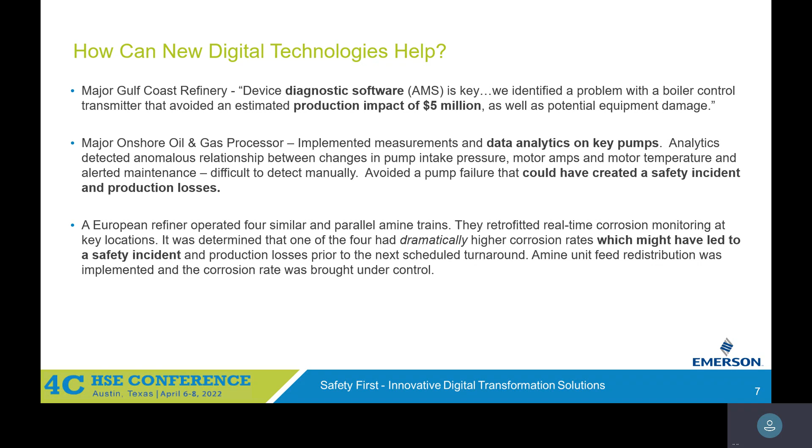So again, these technologies can improve safety. So what I want to talk about really is what happens with safety incidents, what's the problems, what does the data tell us the problem areas are, how can recent technology advances improve the safety, and then what comes next and questions.

So if you have a safety incident, I think of it in these terms: basically you have 4 different types of possible impact: personnel, environmental, financial, and community. And so you have to consider all of these in turn.

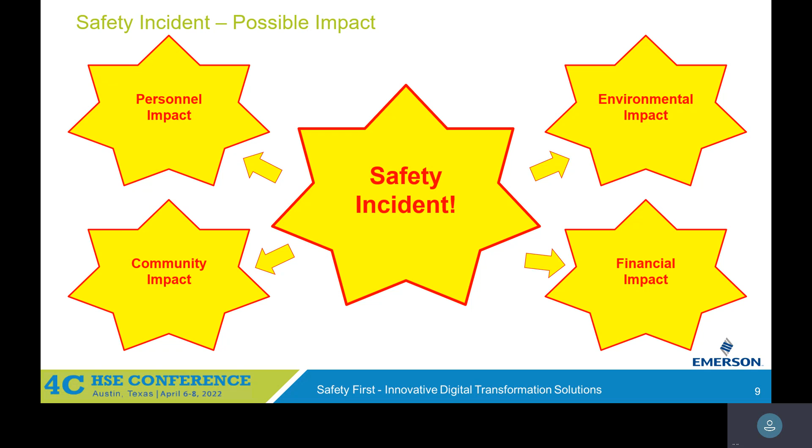If you think about what the safety performance metrics are, how do we decide whether or not these things are important? Here's the list of the metrics in each of these areas: occupational safety, OSHA recordables, environmental, tier 1 and tier 2, loss of primary containment, financial losses, and community problems.

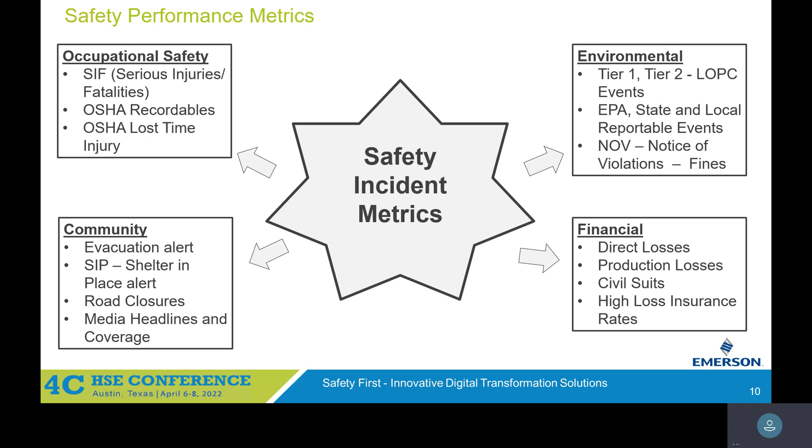So clearly a safety incident can have major impact overall. Now the API has standardized their reporting on safety. Recommended practice 754 allows you to look at data that has been collected.

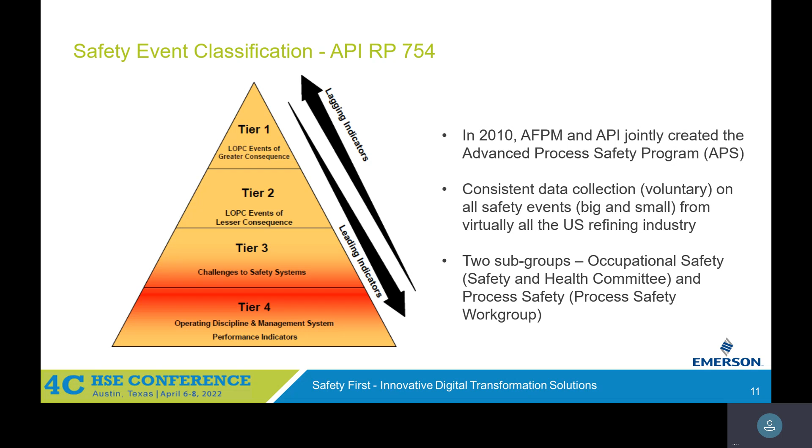Now they have standardized what they're reporting, and the AFPM and the API jointly created the Advanced Process Safety Program. This now considers about 90% of the refined product production in the US and about 75% of the olefin and major petrochemical production contribute data to this. This is publicly available, so you can go to their site and actually see the data on where incidents have occurred.

So what are some of the recent developments in safety? Well, there are three areas you have to be concerned about. First, OSHA, which governs things that happen inside the plant. EPA governs releases that go outside the plant site. And today we also have to be concerned about cybersecurity activities impacting safety, which falls under the government CISA policy.

In 2017, the National Emphasis Program was enacted, and it applies to refineries and chemical plants. It authorizes inspections, and any violation of a PSM standard is considered a condition that is likely to cause death or serious physical harm.

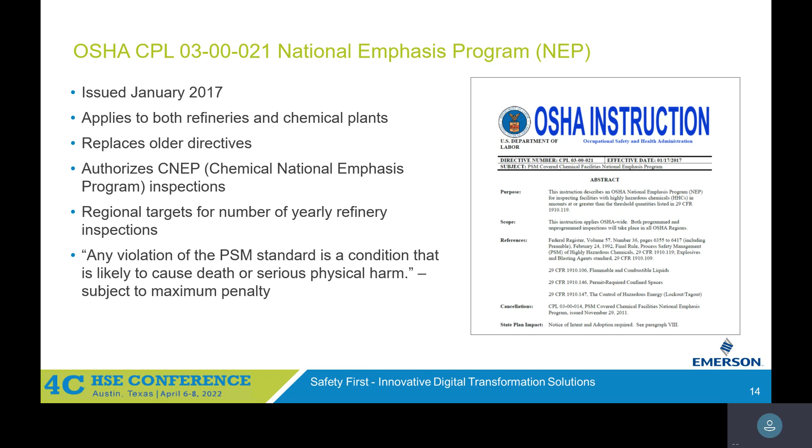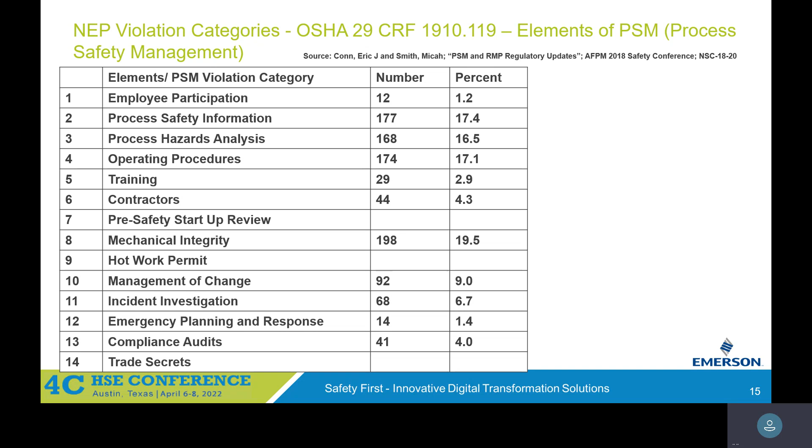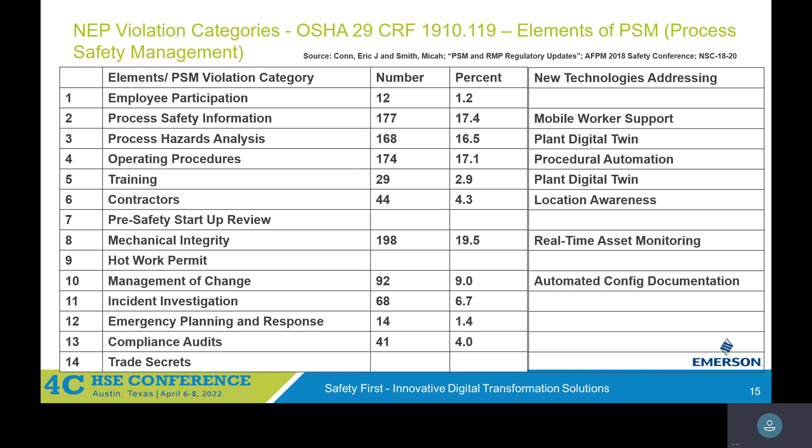What are the new technologies addressing this? Safety information, mobile worker support, plant digital twins, procedural automation for operating procedures, location awareness, asset monitoring, and automation configuration and documentation are new digital technologies that can help address the areas found to be most at risk.

Recognized and generally accepted good engineering practice, RAGAGEP—I'm sure most of you are familiar with this. This is OSHA's requirement for whether or not you're doing a correct job. You can be fined for violation of RAGAGEP, but there's no rigorous definition of it in the PSM standards. Basically, they refer to industry sources and vendor information as recommended practice that you can be held accountable to.

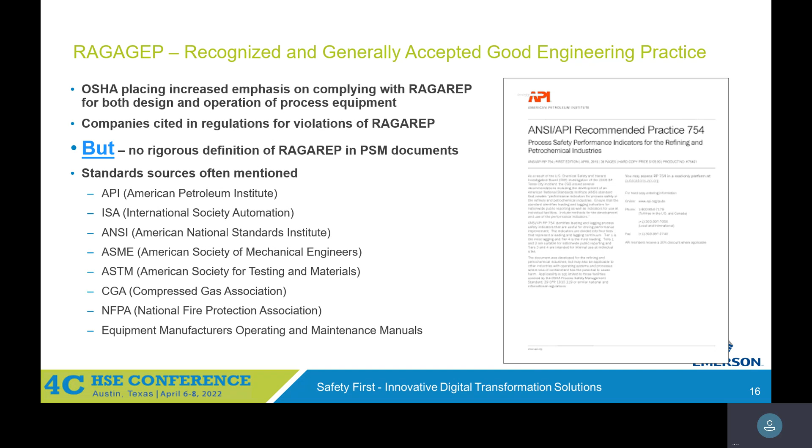The ISA has published a functional safety standard, ISA 61511, which is very widely used. It's also an IEC standard, adopted around the world as a basis for defining what a safety program should be. It covers three different areas, and OSHA has indicated that they consider this to be recognized and generally accepted good engineering practice for safety information and safety instrumented systems. So if you choose to adopt that for your plant, you are following RAGAGEP for this area. Very important.

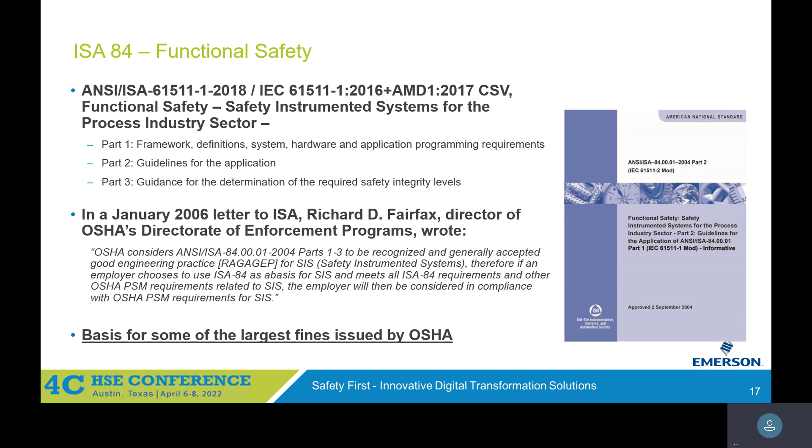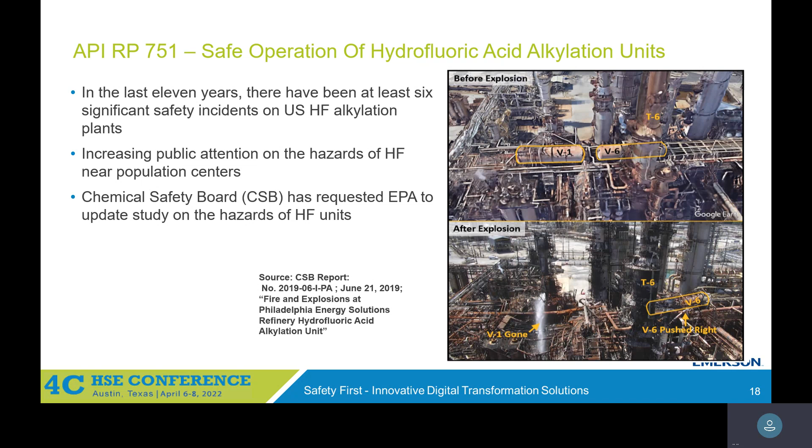The plant I showed in the video was a hydrofluoric acid alkylation unit. There have been at least 6 significant safety incidents on U.S. hydrofluoric acid alkylation units. So the Chemical Safety Board has requested the EPA update their study on these plants to come out with new standards for safety operation.

One of the other contributors to improving safety has been the adoption of integrity operating windows. These are now a standard under API recommended practice 584. This drawing shows what it means: for all the important process variables you measure around a piece of equipment, you're expected to define the normal operating limits, upper safe limits, alarm limits, and other significant areas for violation.

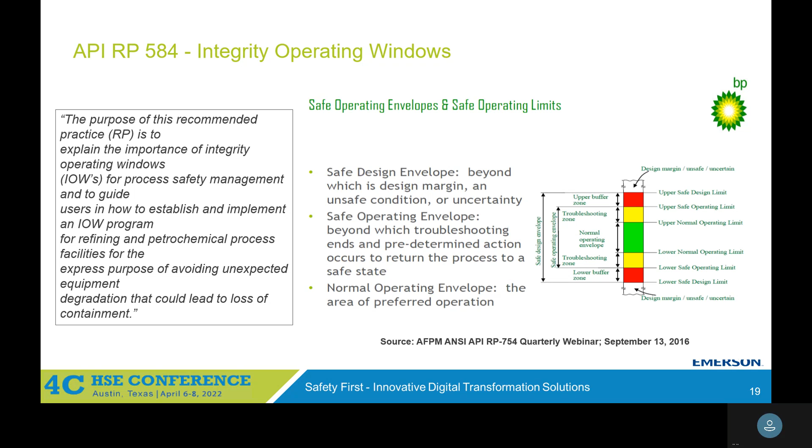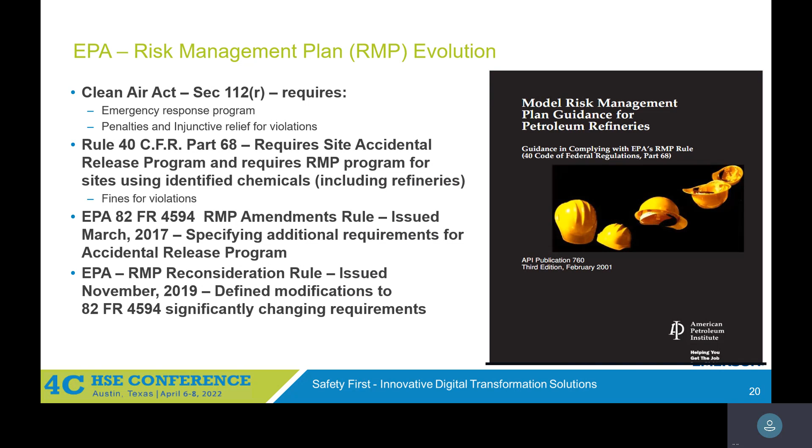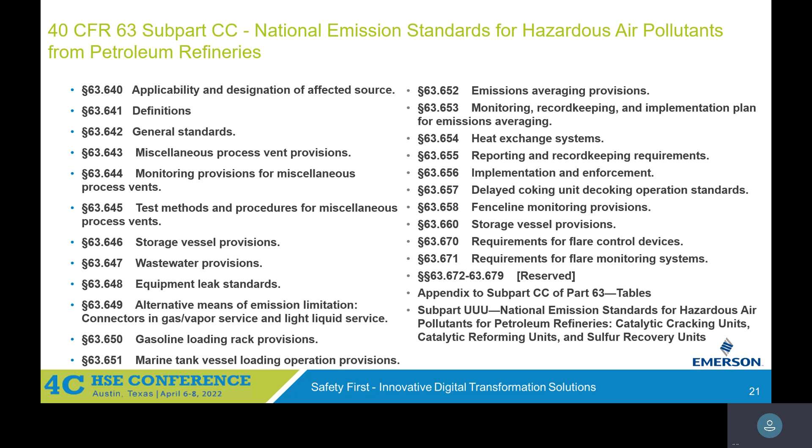Also, EPA has established what they regard as a model risk management plan for refineries. This is published as API publication 760, and it standardizes what they expect companies to have in place regarding safety programs. Again, 40 CFR 63 has defined the emission standards for hazardous air pollutants in refineries, and this is the list of all the different areas covered.

Cybersecurity standards: there are many standards and guidelines on cybersecurity. The Cybersecurity and Infrastructure Security Agency Act of 2018 established the U.S. Department of Homeland Security as a central point for cybersecurity, adopting standards to ensure companies follow correct practice. I think we're all aware of the pipeline issue that happened within the last couple of years, which was a significant cybersecurity impact on the petroleum industry.

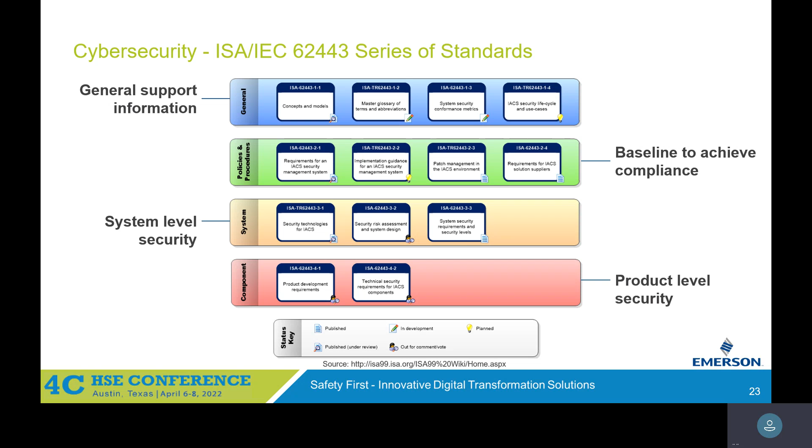ISA and IEC have put together a series of standards on cybersecurity, really defining the different levels: product level security, system level security, the baseline, and then the general support information. So this is the standard for cybersecurity applications in plants.

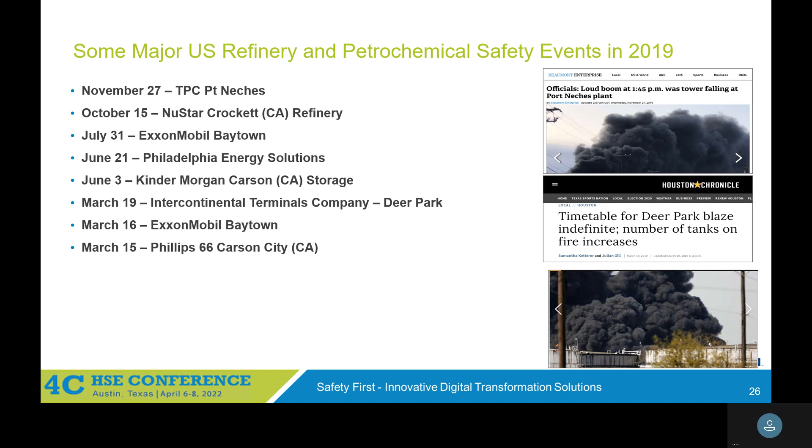So what does the data say? With all of this work, how have we done? Well, here are some of the major events and safety events that have happened in the last few years. 2019 was a very bad year. All of these different events happened in refineries and chemical plants, really in the Houston, Galveston area. So this is not something that has gone away. There still are a large number of these incidents occurring.

Now, what does this mean? Marsh & McLennan publishes data on large property damage losses - basically an incident that costs more than $50 million in insurance claims. And if you look as it goes forward, it increases. In the last year for which there was data, there was almost $1 billion in insurance claims for major incidents in refineries. What does that mean? It means your companies are now paying higher rates for insurance, and in some cases, higher deductibles before the major policies come into effect.

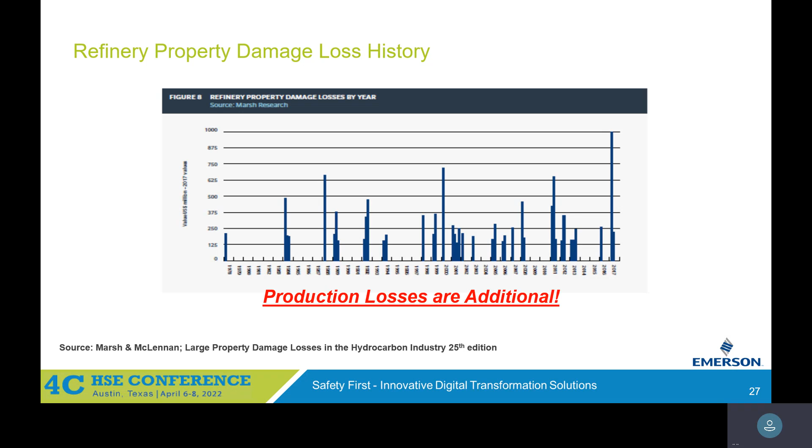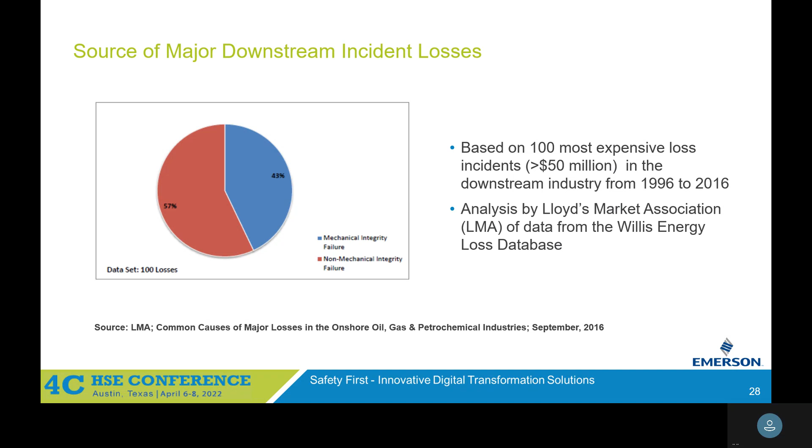And so certainly safety issues can have an impact on the bottom line in terms of the cost of insurance. What does the data say? Well, first of all, they say that mechanical integrity failure is about roughly 43%, and non-mechanical failure is about 57%. So you might say 50-50 in terms of the reasons for the large losses.

And if we look at the primary reason, notice that internal and external corrosion are the largest component of the reason for having these large losses. Under the operating modes, it's not just startup and shutdown - you can see that under normal operation, it still is something for concern.

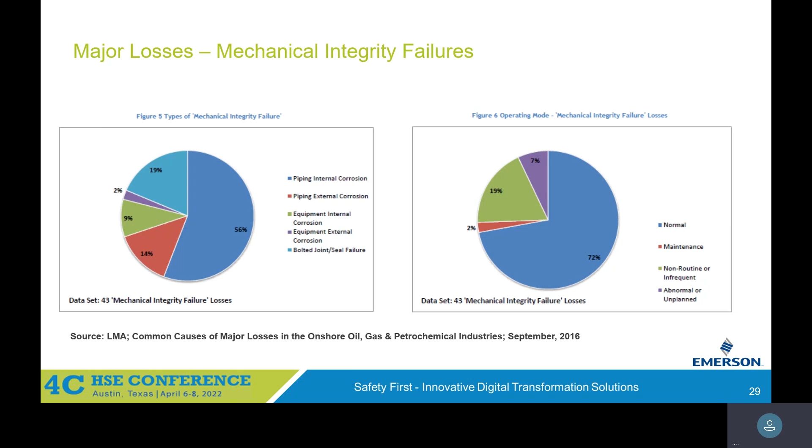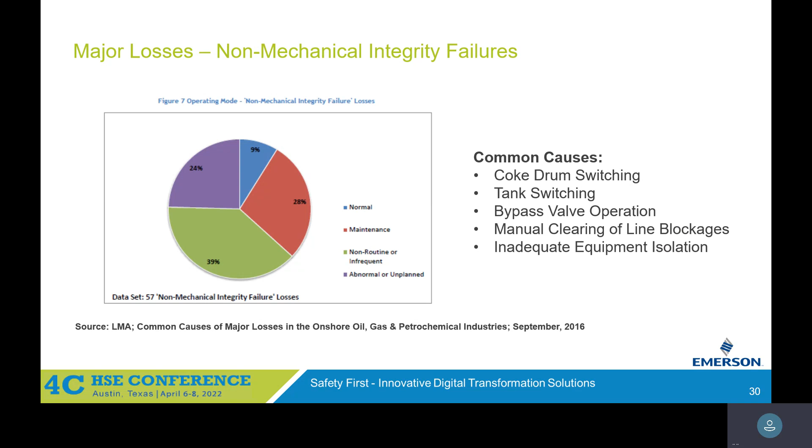If we look at non-mechanical integrity failures, what do we mean by that? Here are some of the areas that they find for common causes for major incidents: coke drum switching, delayed cokers, tank switching, bypassing, manual clearing of line blockages, inadequate equipment isolation. All of these are major areas for problems.

You're familiar with Tier 1 and Tier 2 loss of primary containment. The AFPM also publishes data on that, and you can see that the rate of incidents has been going down for both refineries and petrochemicals, but it still is much too high.

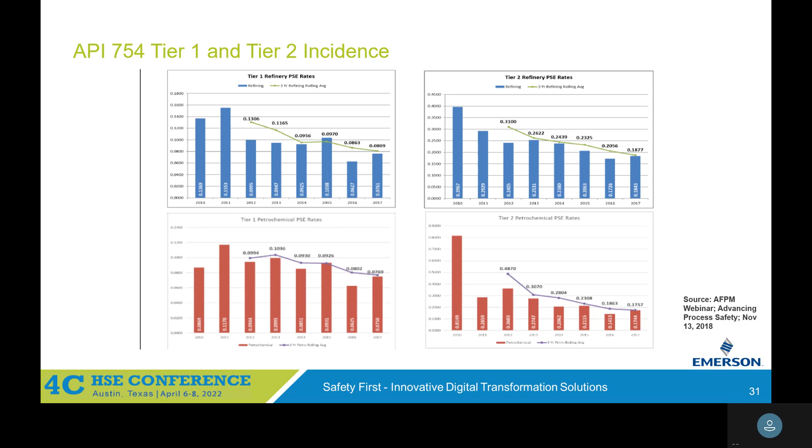So again, what does the data say the primary problem areas are? Here's the point of release - you can see piping systems and atmospheric tanks are number 1 and number 2 on the list, about 48% in piping and other areas. In the area of the refinery where there are problems, the number 1 area is tank farm storage and facility offsites - that's the primary area.

The secondary area is the crude unit, and then you can see other process units as we go around the circle there.

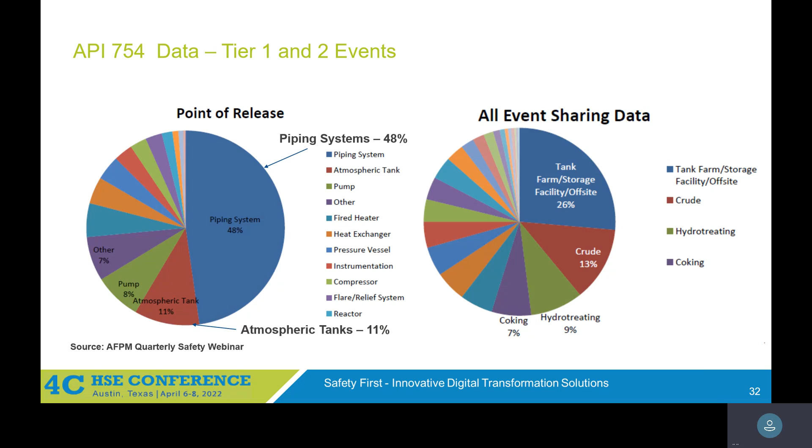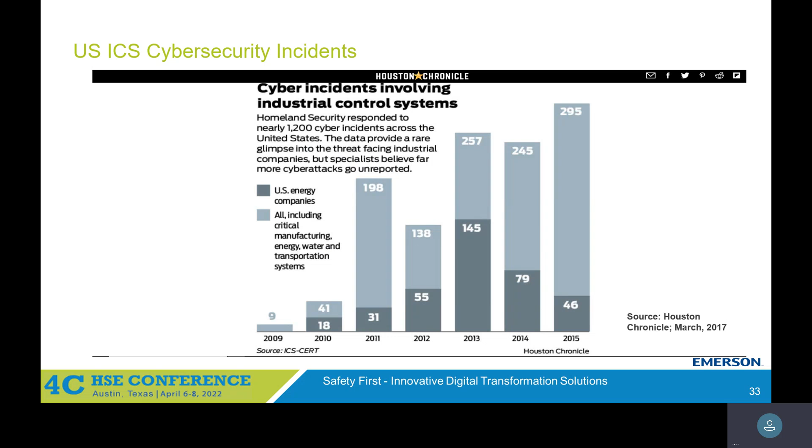Cyber incidents - there really is very little public data available on the number of cyber incidents happening in plants. It's quite difficult, and companies don't seem to want to release this information for some reason. But here is data which can show an increasing number of attempts for cybersecurity incidents - a number of different cybersecurity attacks that have been documented on control systems in industrial facilities.

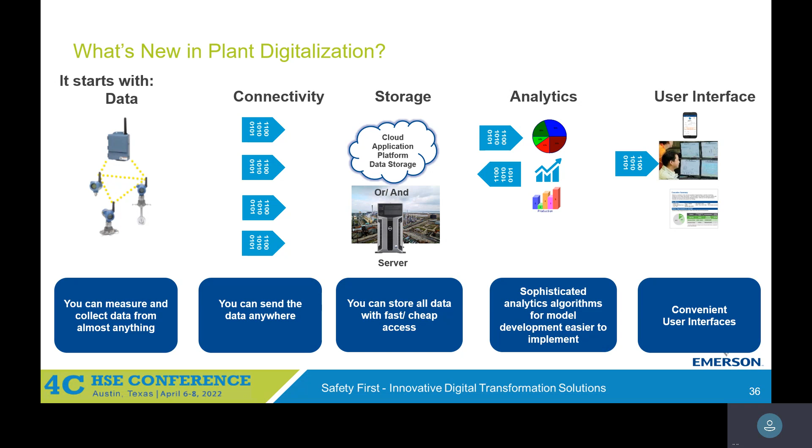So how can technology advances improve this safety? Well, if we look at what's happening in the technology area, if you go out to the exhibit floor, you will see many examples of new plant digitalization applications. Basically, it requires combining together improved measurements, connectivity like wireless, storage, sophisticated analytic algorithms, and then some way of displaying.

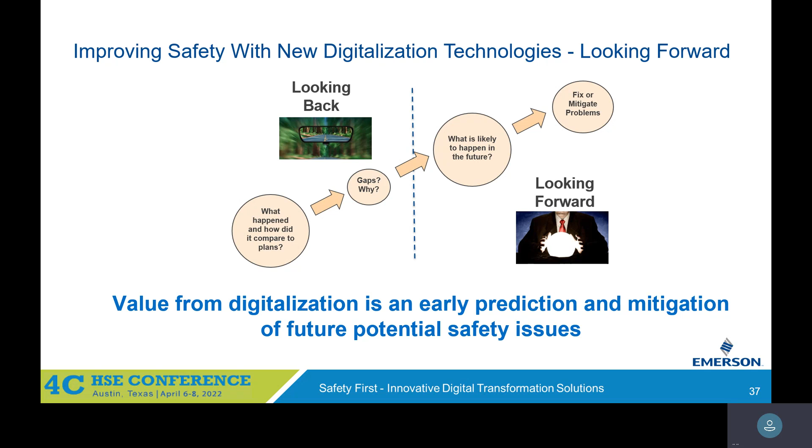So what's the concept behind this? Well, I always say the value of digitalization is early prediction and mitigation of future potential safety issues. In the past, we had data on what happened right now and what happened yesterday. What we were missing was data that looked forward to help us predict how things were going to operate - and that's what this technology is really trying to do, bringing us to the point where we can look forward at where there are problems.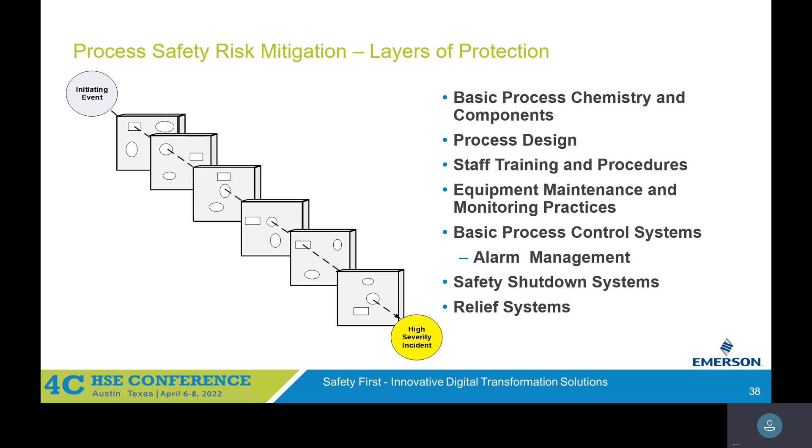This is a Swiss cheese model, which perhaps you are familiar with, which looks at different areas and uses those to analyze what went wrong when we have a high severity incident. These are the major components. Where digitalization can provide safety risk mitigation is in the areas listed here: staff training, equipment maintenance, alarm systems, safety shutdown systems, and relief systems. So digitalization application can provide additional risk mitigation.

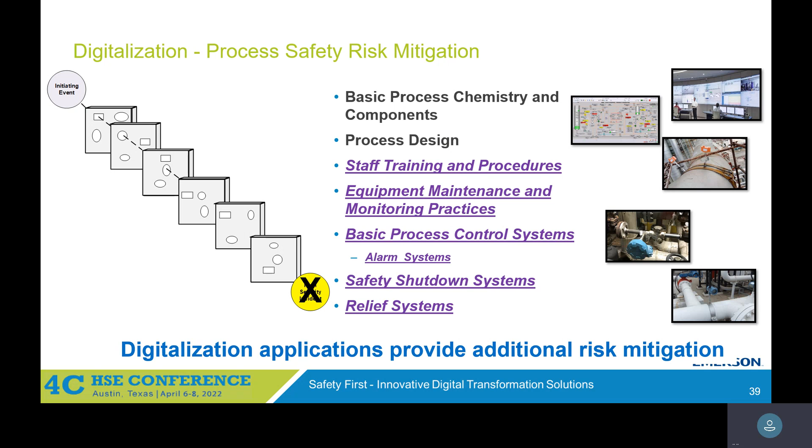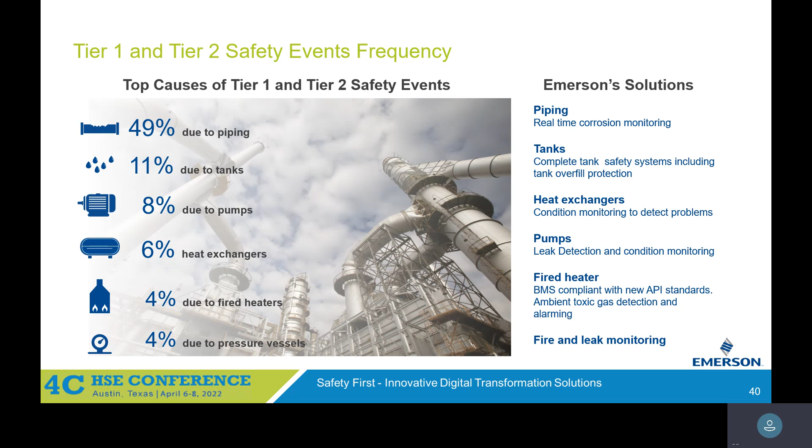Some areas where new digital technology can help: in piping, real-time corrosion monitoring; for tanks, complete safety systems including redundant tank overfill protection; and for heat exchangers, pumps, and fired heaters, as shown here.

So these are the solutions available now to address these problems. They are available and in use at refineries and chemical plants around the world, so it really can help to make the plants better.

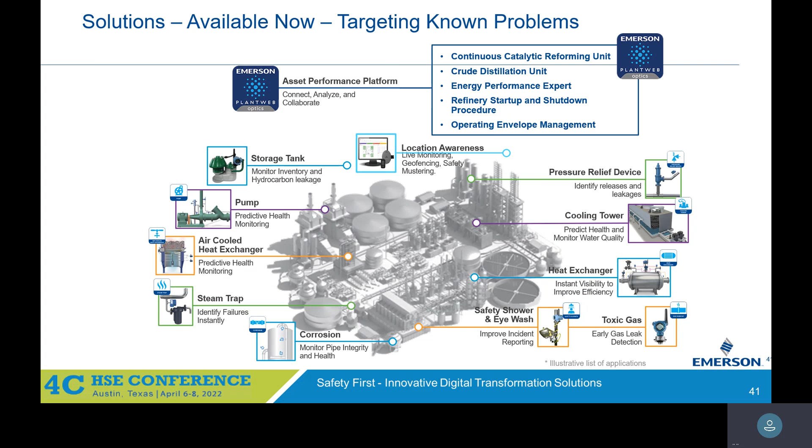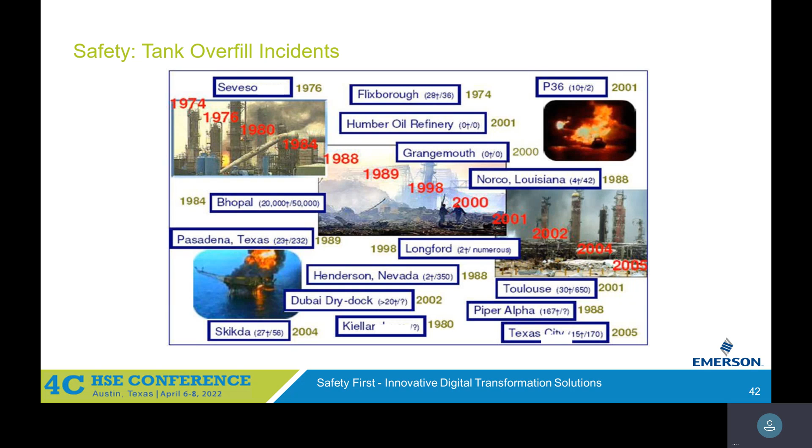But all of these are different areas of tank overfill protection. There is API 2350 now as a standard to indicate the recommended practice for tank overfill protection, which involves redundant measurements and use. And again, that is available as well.

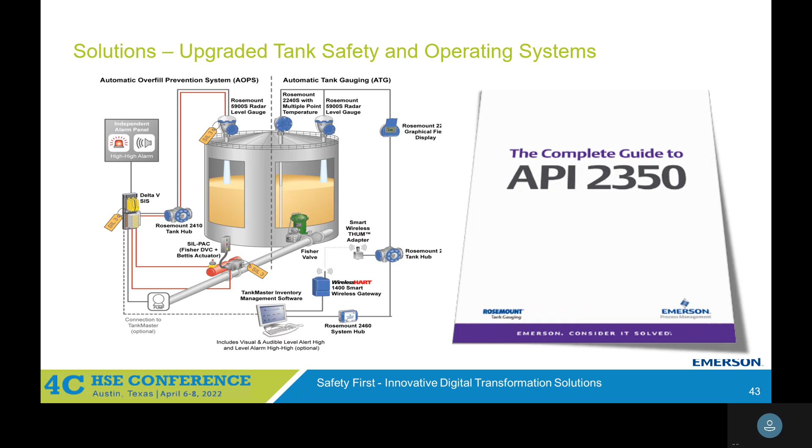So digital technologies have the potential to provide early detection of potential safety incidents and to mitigate the consequences. Cybersecurity incidents are a growing threat that have to be addressed. And fundamentally, Emerson has a comprehensive set of equipment and services to help improve the safety at your plant.

Or solutions? I have a question. Sure. I'm just wondering when a digital solution comes in compared to, for lack of a better word, the analog version that's been entrenched and in place, what are the types of transition issues or opportunities that you're finding? Because I would imagine people are used to their way of doing things, and now there's something new.

Sure. Well, we always say there are three components: technology, operating procedures, and people. So when these new technologies come in, first of all, you have to install the technology and the infrastructure to take advantage of it. That's a primary area.

Second, you have to embed the use of those technologies in the actual operating procedures, so it's part of what's expected of the plant people to be able to do that. And then third, you have to provide training for people on new technologies.